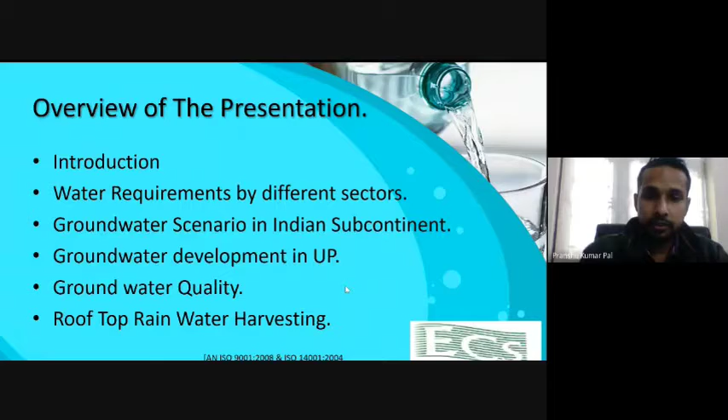Coming on to the introduction, we know water is one of the most important things for human existence, and the human body itself contains about 70% water, and without water, human existence is not possible. Coming on to India - it is home to 16% of world's population, with 2.5% of world's land, but has only 4% of world's water resources at its disposal. And we receive precipitation in the form of rainfall and snowfall, which is about 4,000 trillion liters of fresh water to India. But most of the fresh water returns back to seas and oceans via large rivers flowing all across the subcontinent.

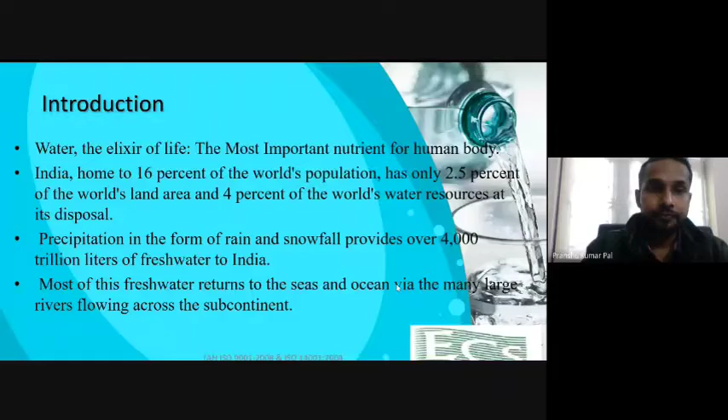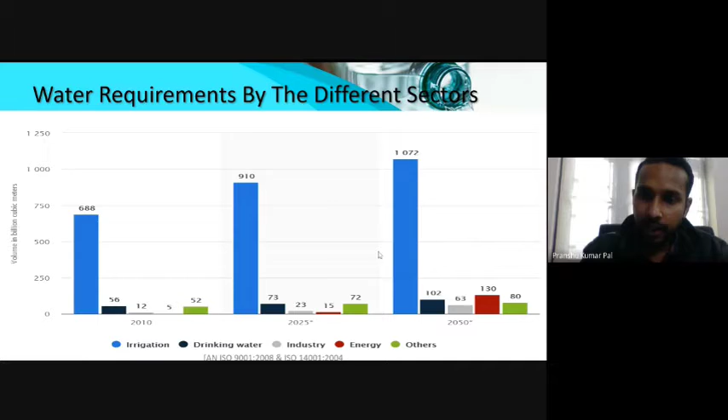Now coming on to the water requirements by different sectors in India. This is the data from Central Groundwater Authority. In 2010, the requirement was 688 billion cubic meters per year. For drinking purpose it was 56, for industry it was 12, for energy it was 5, and the rest 52 - so irrigation contained about 85%, drinking water was 7%, and industrial was 5%. You see the drastic increase in water requirements by different sectors in 2025, and for 2050 it was estimated as follows.

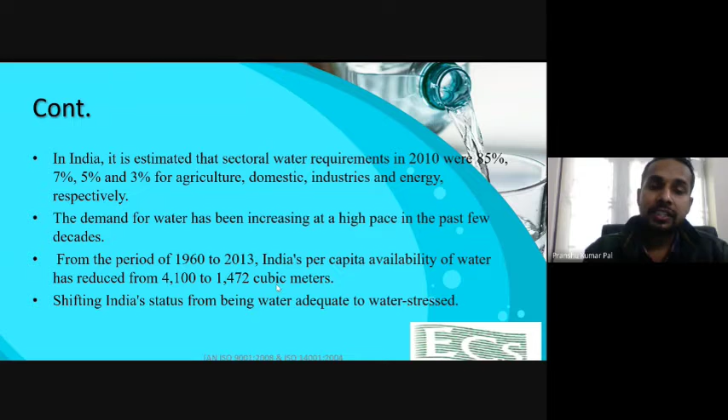Now I have talked about this pointer that 85% was irrigation, 7, 5, and 3 are domestic, industrial, and energy respectively. The water demand has been increasing at a high pace in the past few decades, and from the period of 1960 to 2013, India's per capita availability of water has reduced from 4,100 to 1,472 cubic meters, which has shifted India's status from water adequate to water stressed region.

Now the groundwater scenario in the Indian subcontinent. India's water potential is about 1,869 billion cubic meters per year, but out of which only 1,123 billion cubic meters is usable. Surface water is 690, whereas groundwater is 433 billion cubic meters per year, and out of 433, 35 goes into natural discharge. Thus the net annual groundwater availability of India is 398 billion cubic meters per year.

Now we have only 398 billion cubic meters, but dependency on groundwater is so large in India that about 90% of the groundwater is used for irrigation purposes, for irrigating our agriculture fields in India. About 80% of India's population is highly dependent on groundwater, and our green revolution was also based on groundwater. Due to groundwater only, there was a 25% growth in the agriculture sector.

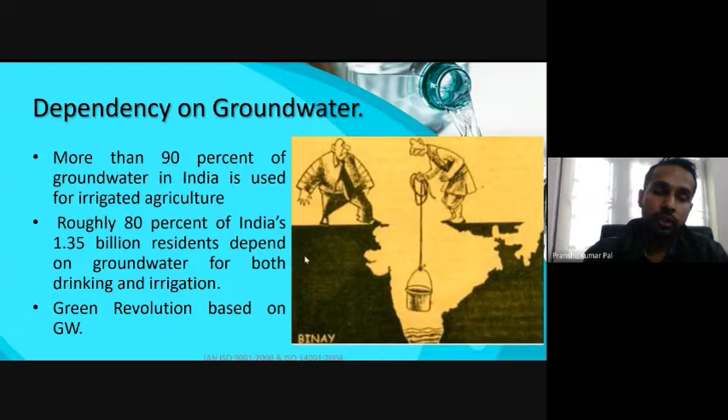Now the groundwater distribution - we all know generally what groundwater is. Groundwater development is the ratio of annual groundwater extraction to the net groundwater availability, and it generally indicates the quantity of groundwater available for use. Based on groundwater development, the comparative status of India has been segmented into 4 parts: safe, semi-critical, critical, and overexploited. If groundwater development lies between 0 to 70%, it is considered safe. For semi-critical, it is 70 to 90%, for critical it is 90 to 100%, and for overexploited, it is more than 100%.

And the groundwater distribution, groundwater development - the number of districts that come under safe are 4,520 districts, for semi-critical 681, critical 253, and for overexploited it's 1,034 districts.

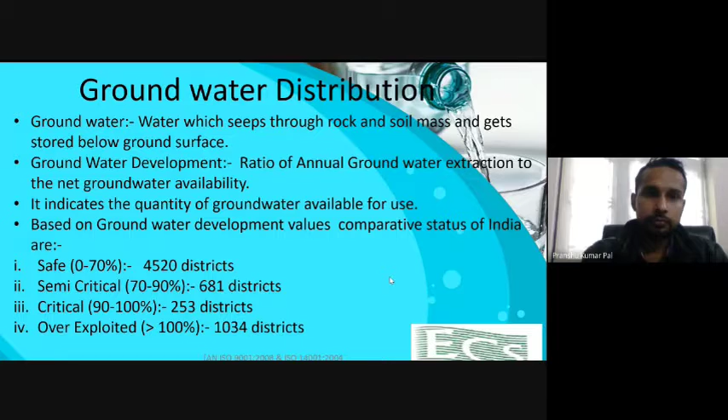Now the groundwater scenario of UP - the hydrogeology of UP can be divided into 5 parts: Bhabar, Tarai, Central Ganga Plains, marginal alluvial plains, and southern peninsular range. Kanpur lies in this Central Ganga Plain. If we move from north to south, the northern part of UP comes under Bhabar, then Tarai, then Central Ganga Plain, and the Bundelkhand region lies in the southern peninsular plains.

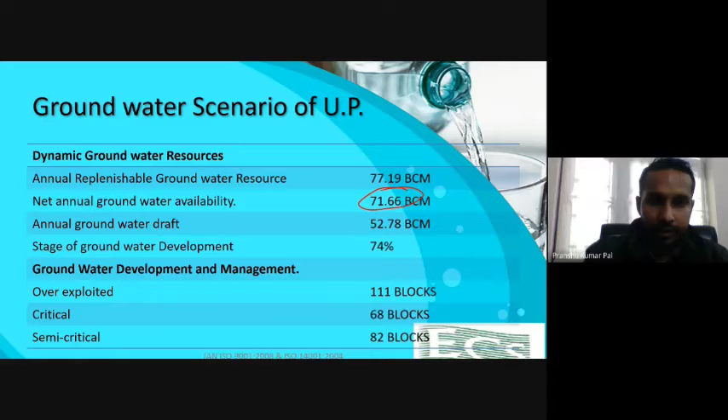Now for UP, the dynamic groundwater resources are as follows: the annual replenishable groundwater resource is about 77.19 billion cubic meters, and net annual groundwater availability is 71.66 billion cubic meters. The annual groundwater draft is 52.78, and the stage of groundwater development in UP is 74%.

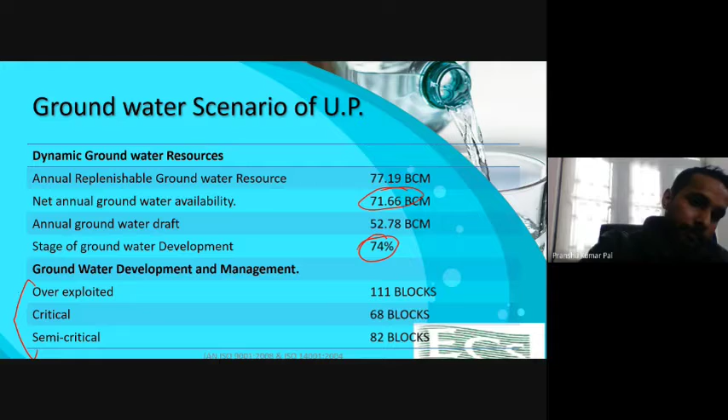We will further talk about Kanpur in the next slides, regarding groundwater development and management. The overexploited regions are 111 blocks, semi-critical are 82, and critical are 68. This was given in the Model Bill 2005, proposed by the Government of India.

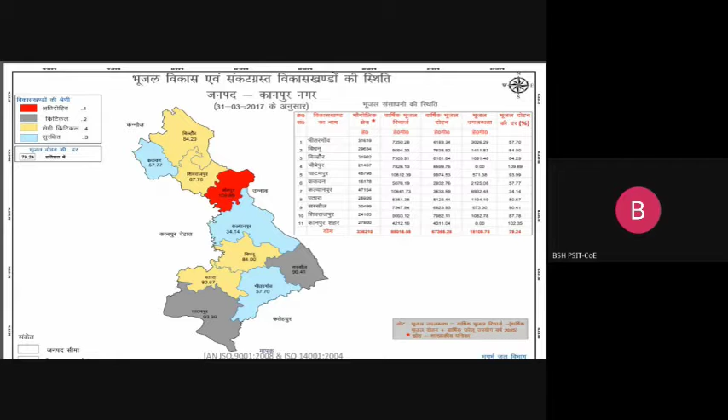Now in this slide you can see the map of Kanpur, with the various blocks shown in the figure. You see Chaubepur, it lies in the overexploited region, whereas we lie in Kalyanpur. It is said to be safe, but according to recent data from the UP Groundwater Board, Kanpur city comes under the overexploited region.

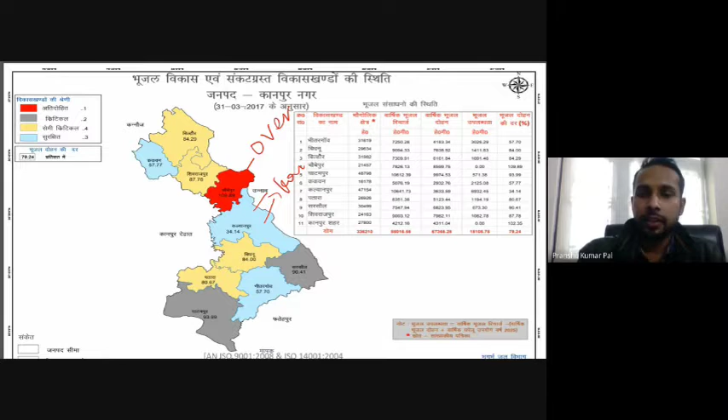You can see the yearly declining trend of the groundwater table. If we talk about Kanpur Nagar, Shivrajpur and Kalyanpur, the annual declining trend is 1 to 10 centimeters per year, and for Chaubepur and Bidhnoo, it's between 10 to 20.

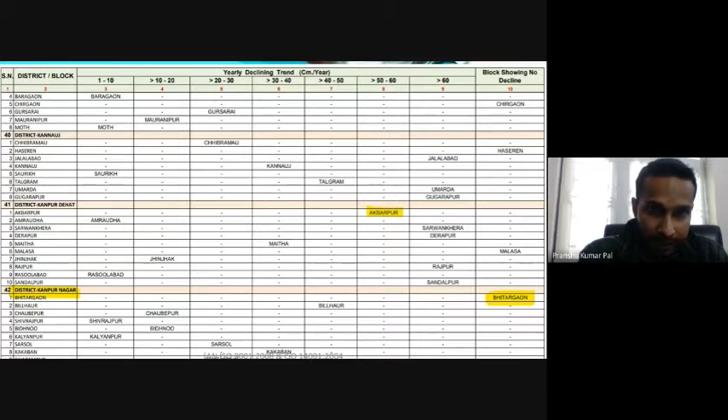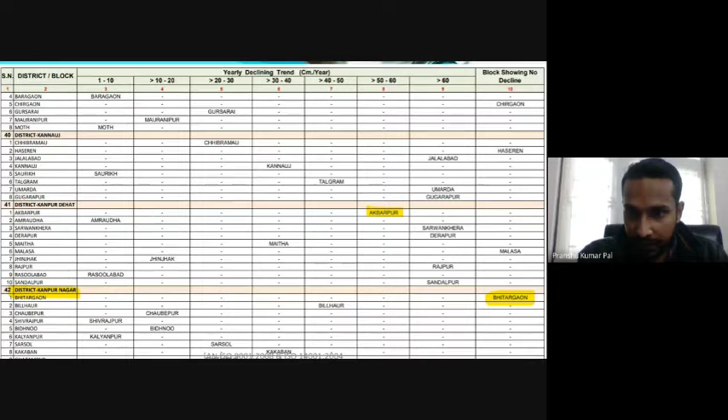Similarly, if we talk about Patara, it is declining very rapidly, more than 60 centimeters per year. For Kanpur Dehat, you see Sarwankhera, Derapur, Rajpur, and Sandalpur - all these are declining at a very fast pace of more than 60 centimeters per year.

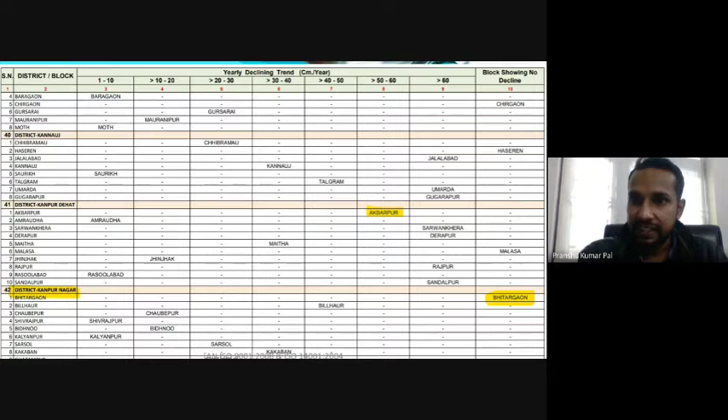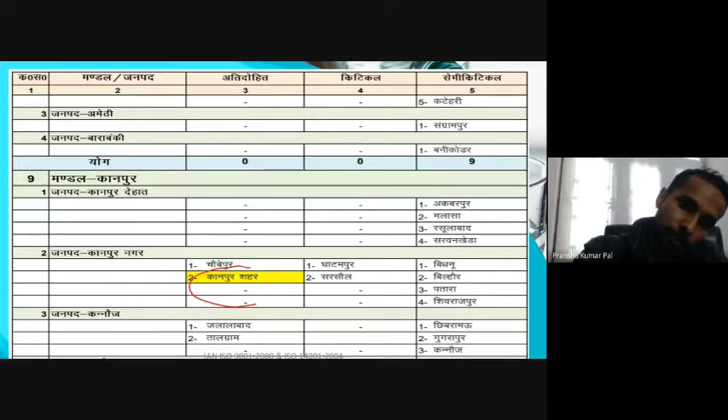You see this is the overexploited region, shown as Kanpur city and Chaubepur. In this table, if you look at Kanpur city, this is the new stage of groundwater extraction. Earlier in 2012 it was about 70, but in 2017 this data shows it's about 79.24 - a 9% increase has been seen in 3 to 4 years.

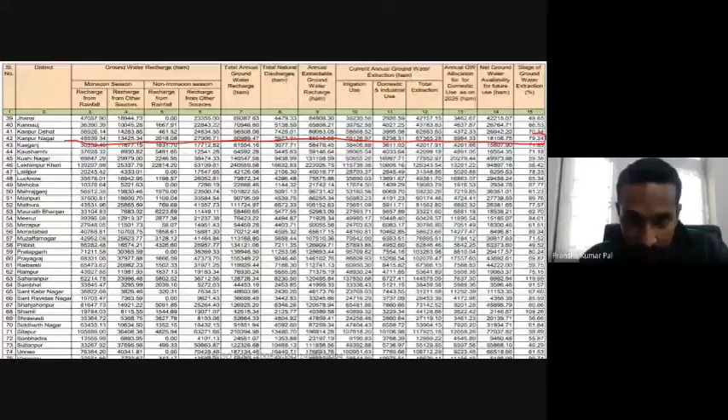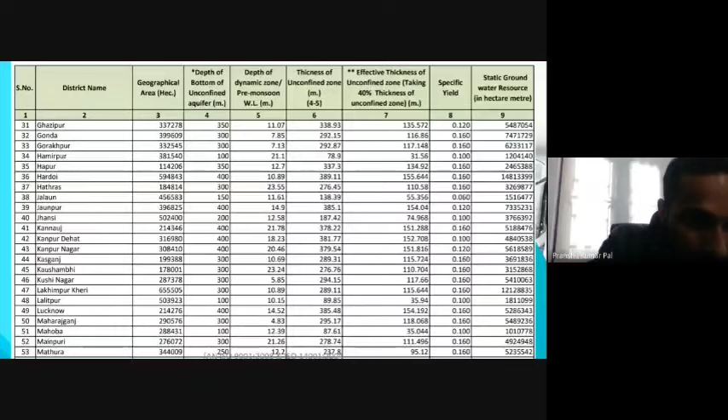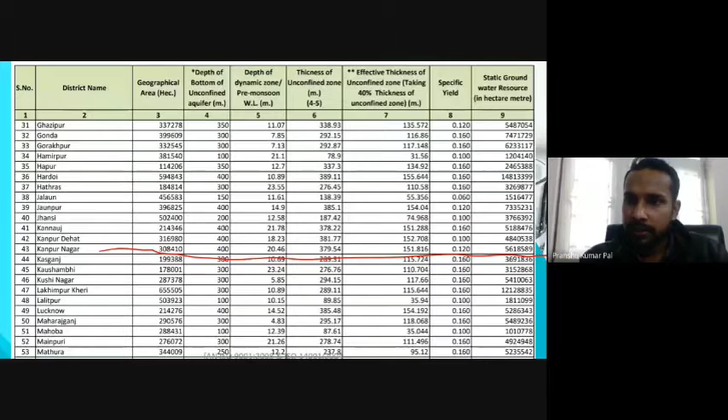This table shows groundwater recharge for monsoon and non-monsoon seasons, the total availability of groundwater, and current annual groundwater extraction for various cities, focusing mainly on Kanpur. Again for Kanpur, the specific yield is about 12%, and the static groundwater resource is 56,18,589, with the thickness of the groundwater table shown.

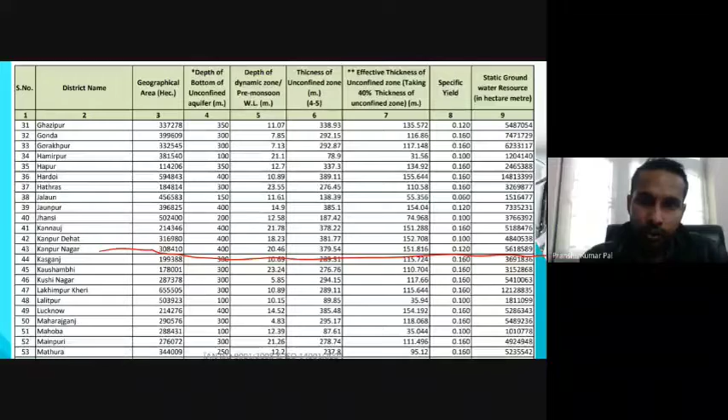Now we have talked about groundwater quantity. Now we will talk about groundwater quality in UP. If we talk about salinity, the most affected districts are Agra, Hathras, and Mathura.

For fluoride, the most affected districts are Agra, Aligarh, Etah, Firozabad, Jaunpur, Kannauj, Mahamayanagar, Mainpuri, Mathura, and Maunath Bhanjan. We all know that fluoride causes fluorosis, so it is a very acute problem.

Similarly, for chloride and iron, these are the affected districts. In some areas of Kanpur, iron is a prominent contaminant. For arsenic, these are the new districts affected, and it is not clear to agencies whether this contamination is geogenic or anthropogenic till now.

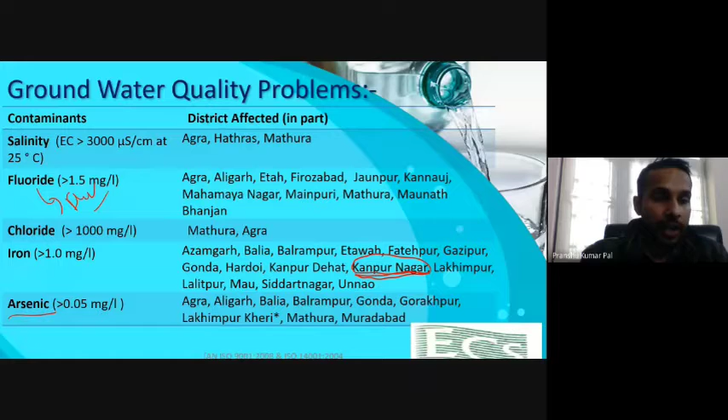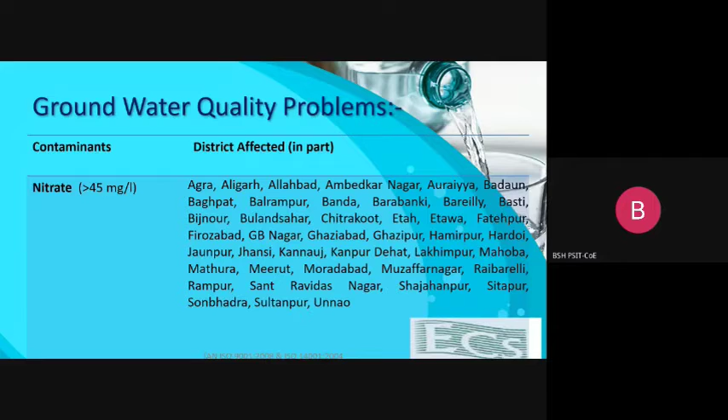And for nitrate, it is heavily affecting a number of districts. These were the problems related to quantity and quality of the groundwater.

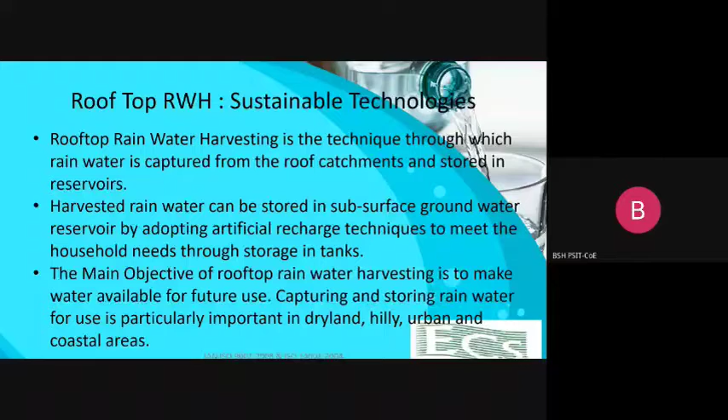Now talking about sustainable technologies, rooftop rainwater harvesting is one of the prominent technologies we can use to replenish the groundwater. It is a technique through which rainwater can be captured from the roof catchment and stored in a reservoir. Harvested rainwater can be stored in subsurface groundwater reservoirs by adopting artificial recharge techniques to meet household needs through storage in tanks. The main objective of rooftop rainwater harvesting is to make water available for future use, particularly important in dryland, hilly, urban and coastal areas.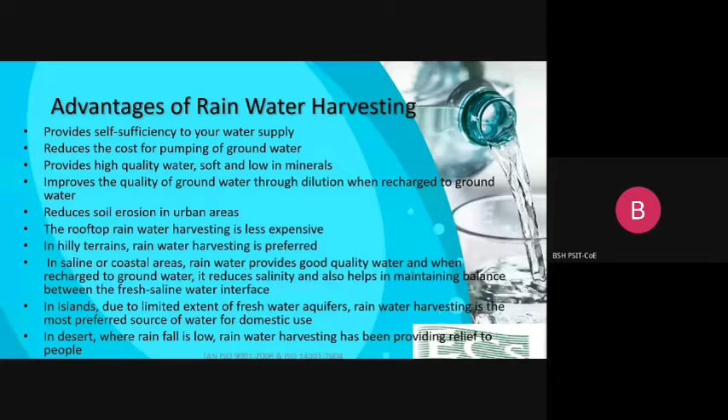Now, what are the advantages of rainwater harvesting? It provides self-sufficiency to water supply, reduces the cost of pumping of groundwater. It provides high quality water, soft and low in minerals, improves the quality of groundwater through dilution when recharged to groundwater, and reduces soil erosion in urban areas.

The rooftop rainwater harvesting is less expensive than other technologies. In hilly terrains, rainwater harvesting is preferred. In saline coastal areas, rainwater provides good quality water when recharged to groundwater. It reduces the salinity and helps maintain balance between the fresh-saline water interface. On islands, due to limited extent of fresh water aquifers, rainwater harvesting is the most preferred source of water for domestic use. In deserts, where rainfall is low, rainwater harvesting has been providing relief to the people.

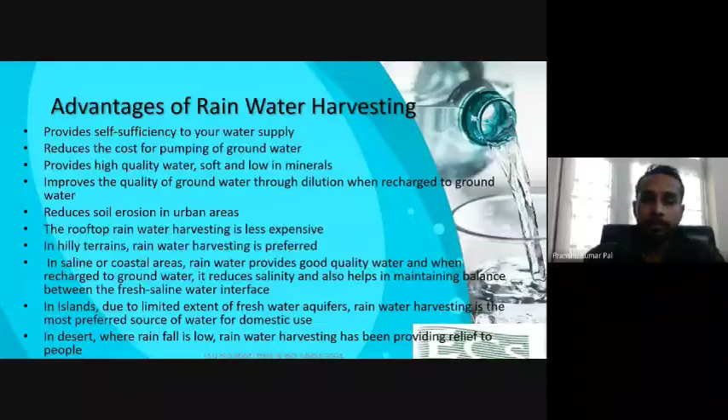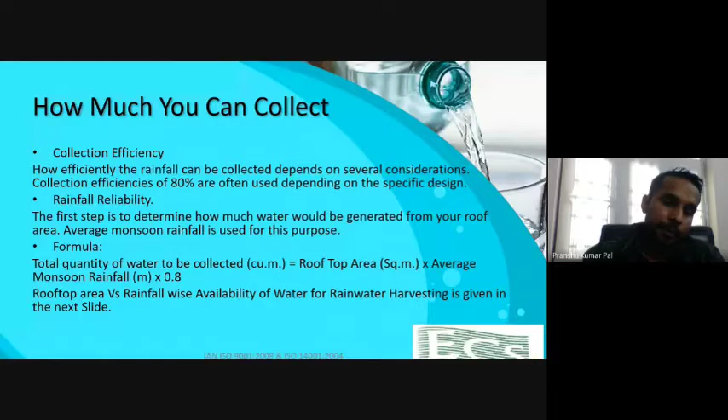So now we come to the designing part of the rainwater harvesting system. First of all, before installing the rainwater harvesting system, we should know how much water we can collect through this system.

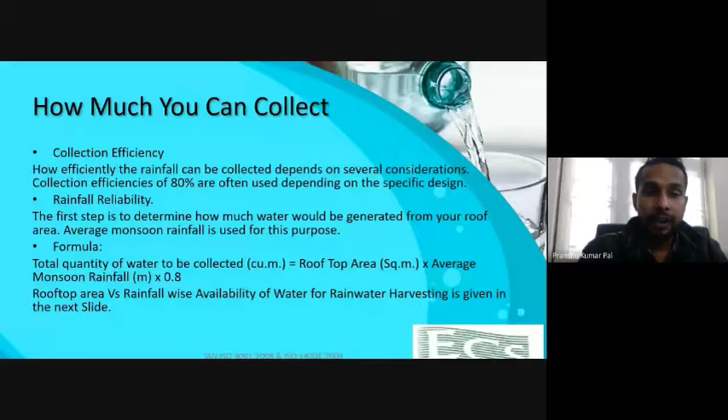Generally we adopt 80% collection efficiency, and 20% is the loss. And we must know the rainfall reliability, meaning the average rainfall and the rainfall intensity at a particular place, before providing the setup of rainwater harvesting at our premises.

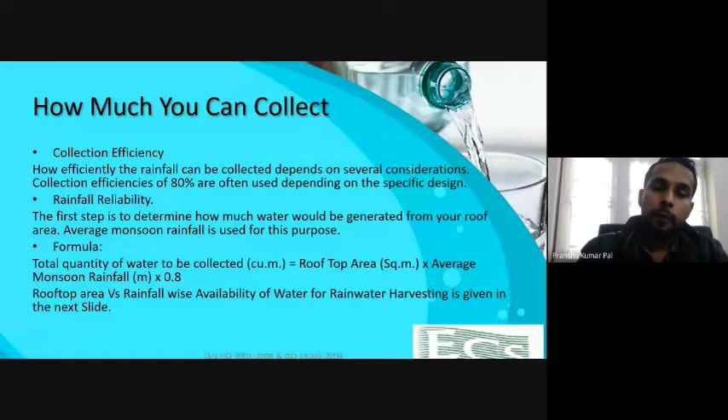So the total quantity of water that can be collected is calculated by the following formula. First, we should know the rooftop area in square meters, and the average monsoon rainfall. For Kanpur, it is about 820 centimeters per year on average, and 80% is the collection efficiency.

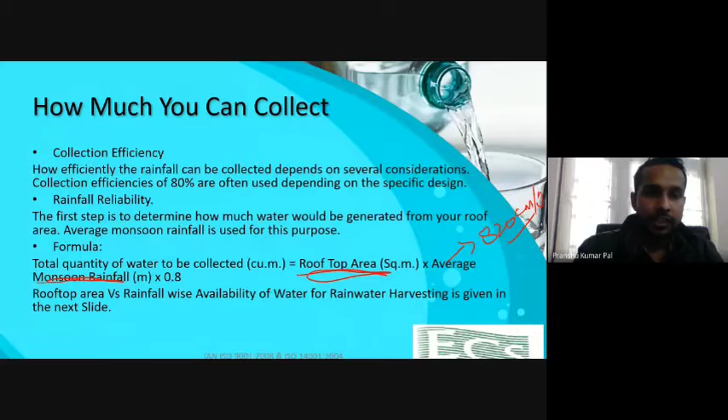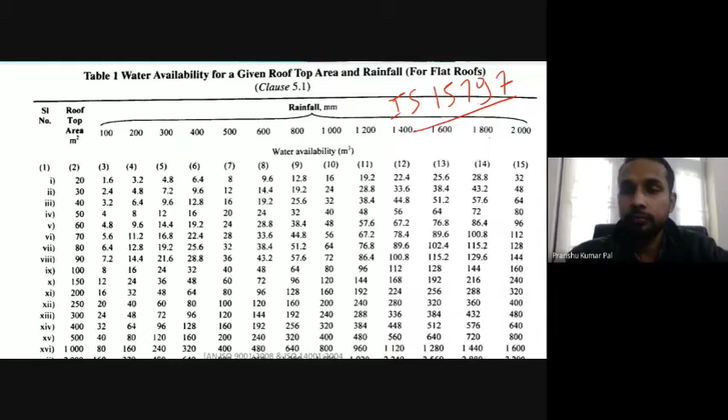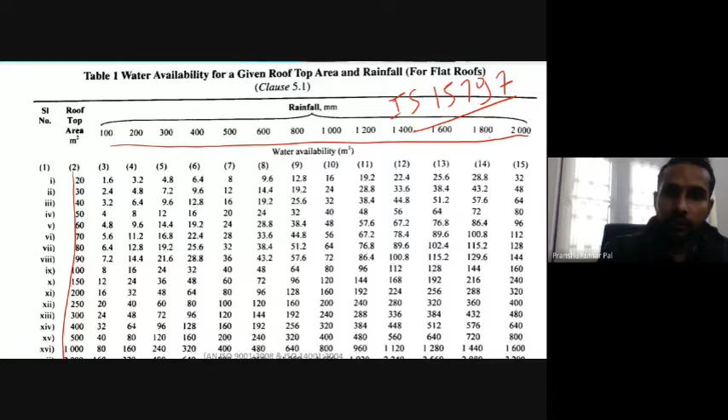Now, for the designing of rooftop rainwater harvesting, we follow IS 15797. In this table, we can see the rooftop area has been given in the second column, and the average rainfall is on the x-axis. Through this we can calculate the water availability in cubic meters at a particular area.

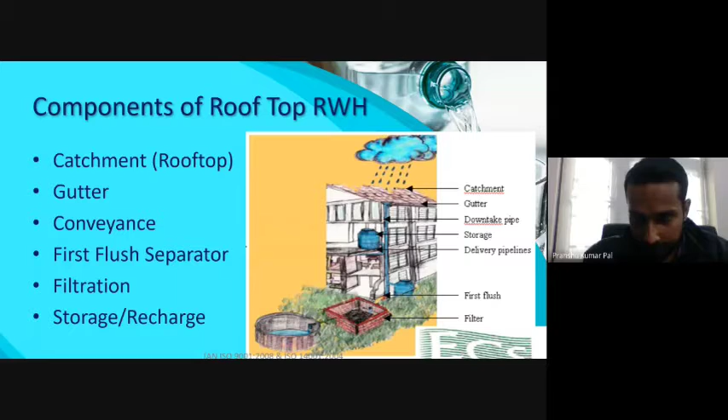Now the components of rooftop rainwater harvesting: first catchment, then gutter, conveyance, first flush separator, filtration, and storage. You can see in this diagram the different parts have been labeled.

Now, talking about the catchment, it is the surface from which rainwater is collected for storage. This could be the rooftop, a paved flooring surface, or a landscape area. Catchment area is the area of that surface, usually calculated in square meters.

The gutters and downtake pipes lead the water from the catchment to the storage tank. The filters and first flush devices are provided because the water may contain leaves and dirt which may clog our system. So a first flush system is provided, and dissolved air pollutants are also present in the first rain. The storage tanks are provided, which may be above or below the ground.

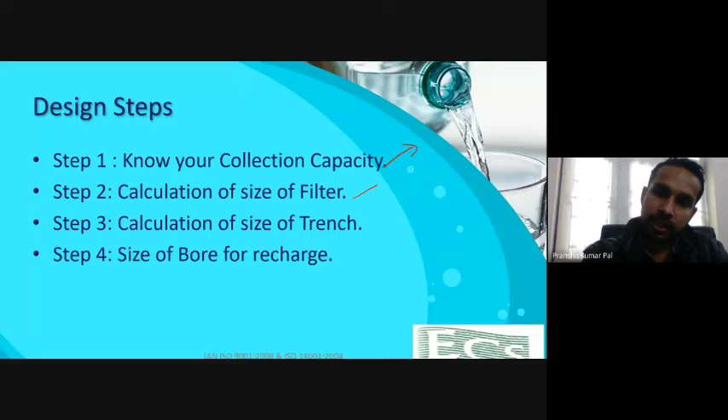So coming on to the design steps, we must know the collection capacity that we have calculated in the earlier slide. Then calculation of the size of filters, calculation of size of trench, and size of bore for recharge. We'll know about it in the next slides.

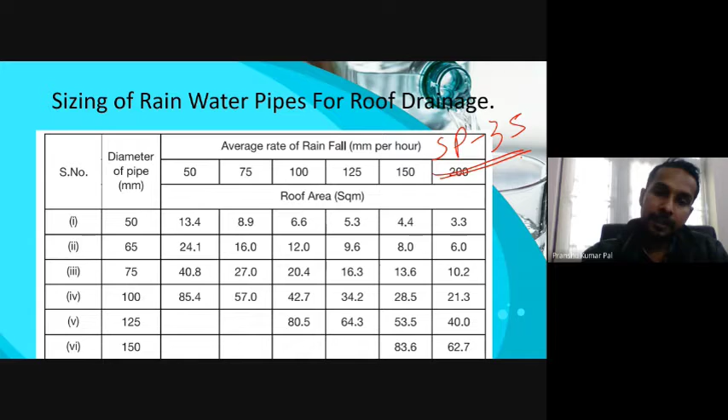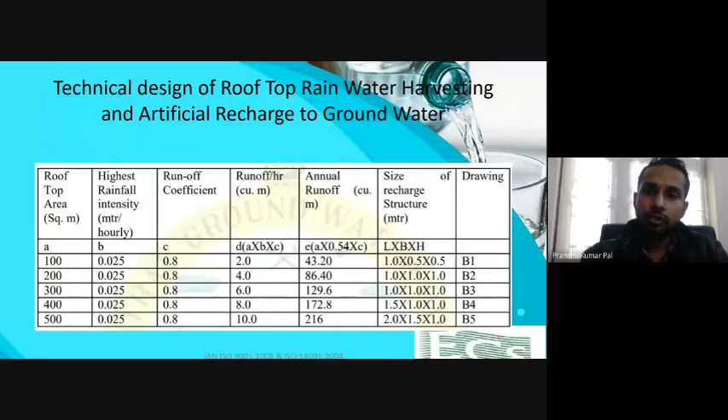This is the technical design of rooftop rainwater harvesting and artificial recharge to groundwater. In the first column, A, the area of the rooftop in square meters is given. This is the highest rainfall intensity in column B, given as 0.025, for the state of Delhi.

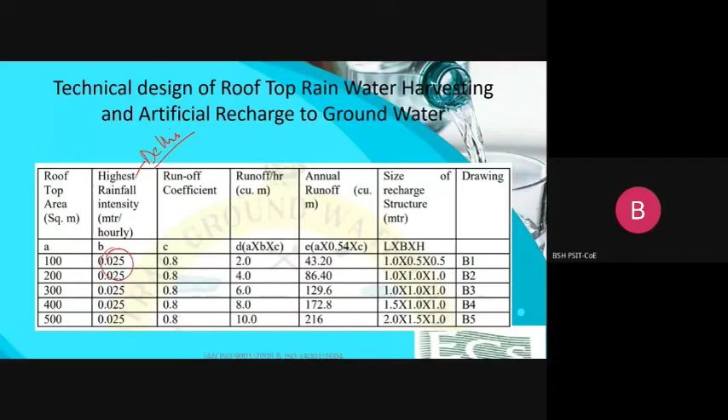This data is from the Central Groundwater Board, and the runoff coefficient is 0.8. Runoff per hour is calculated by multiplying columns A, B, and C, and the annual runoff is calculated as A into 0.54 into C, where 0.54 is the average rainfall of Delhi.

Similarly, if we have to calculate for Kanpur, then instead of 0.54, it would be 0.82, and the rainfall intensity ranges from 0.035 to 0.045 from place to place in Kanpur, and generally we take 0.04.

So this is the size of the recharge structure. We'll see in the further next slides, in the further drawings.

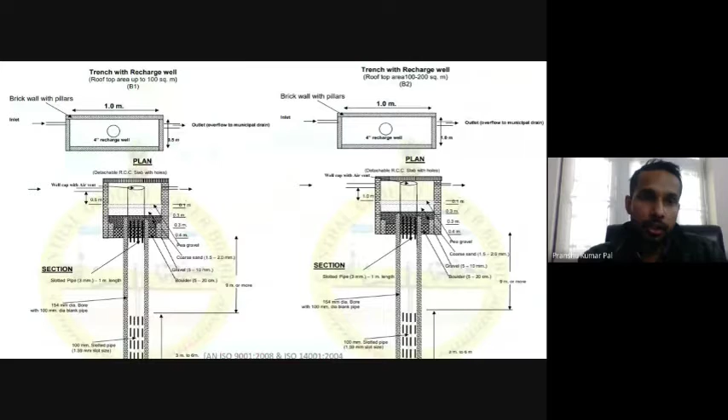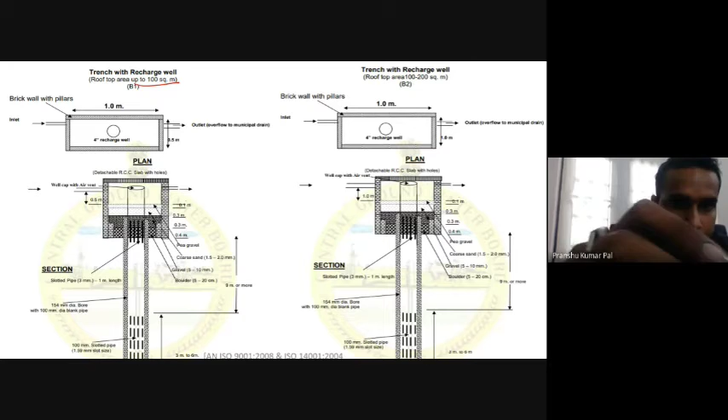This is the diagram for the rooftop area up to 100 square meters. The size of trench that we take is 1 meter by 0.5 meter, and the bore size is 4 inches. This is the plan, and this is the cross-sectional view of this drawing.

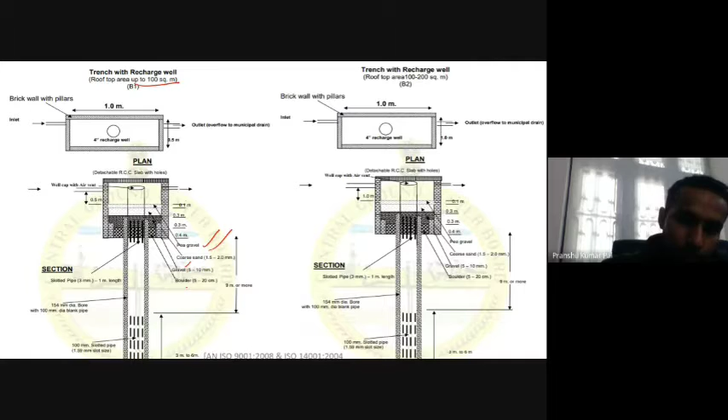And we provide pea gravel, coarse sand, gravel, and boulders, and the pipe is slotted at two places: here at the filter, where we provide filter, and at the last. In the end, we provide a ball plug.

The total depth of the boring is about 50 to 100 feet, but here in industry we take about 100 feet of boring, and we provide the filter same as prescribed in the Central Groundwater Board report.

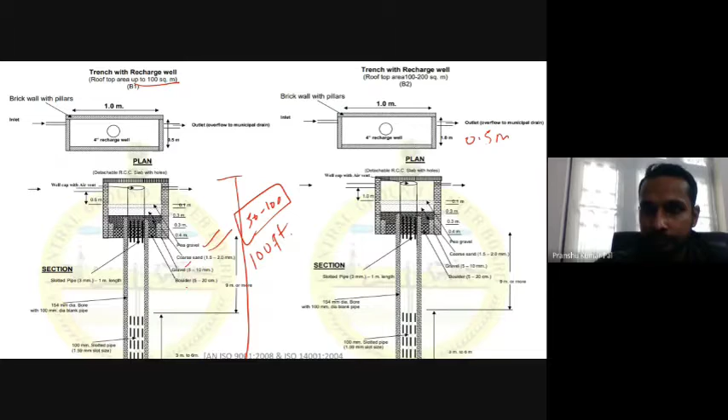So this is the cross-sectional view, and for the rooftop area between 100 to 200 square meters, the trench size has been increased by 0.5 meters, and rest it's the same, as you can see.

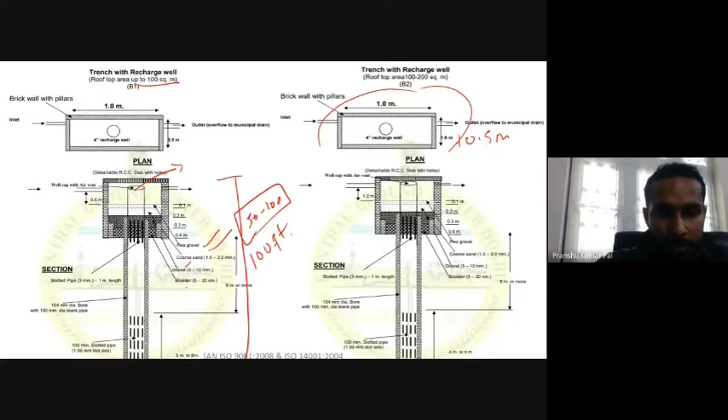One thing we have to focus on is that we have to provide an air vent so that gravity flow must take place, and capillary action should not occur. Another thing is the pea gravel that we use.

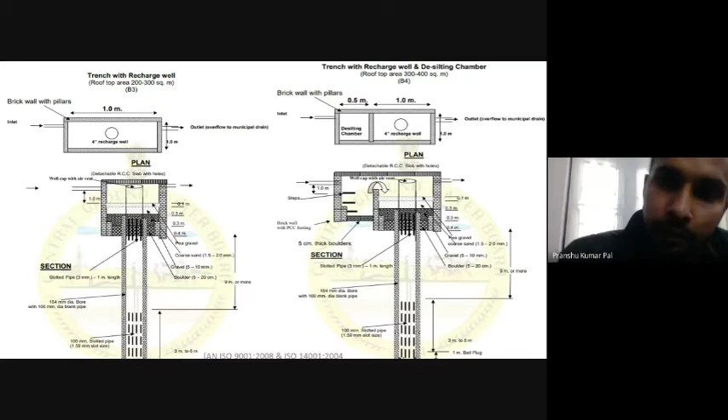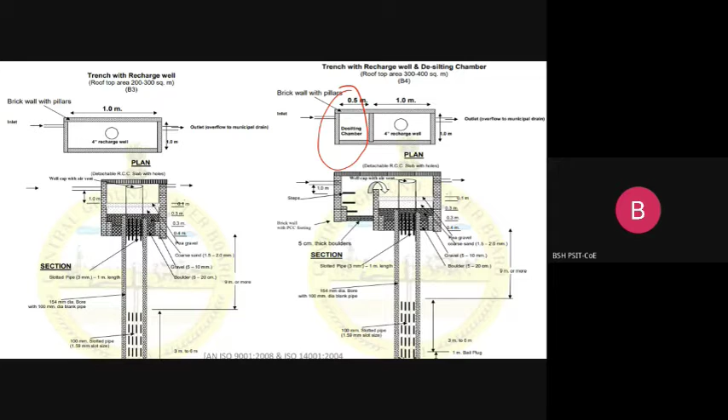Similarly, for 200 to 300 and 300 to 400 square meters, the size of the trench has been increased. For 300 to 400, one additional provision has been made, a desilting chamber of 0.5 by 1 meter, so that our system does not clog. The silt and grit coming with the water settles down there, and a free flow passage is provided.

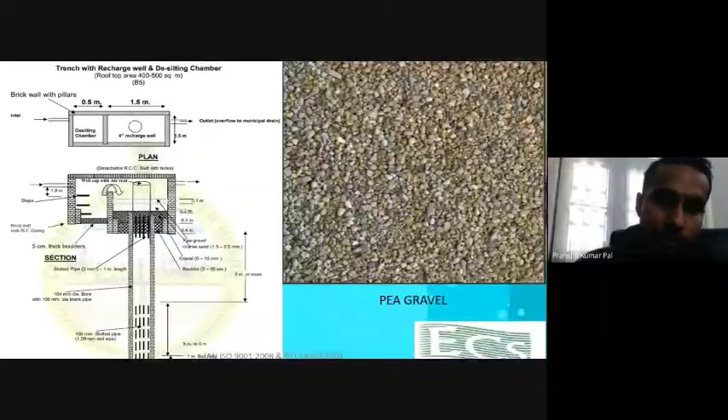For the rooftop area between 400 to 500 square meters, we follow this drawing, where the desilting chamber size and the trench size have been given. The trench is about 1.5 by 1.5 meters, and the desilting chamber is 1.5 by 0.5 meters, and all other things are similar.

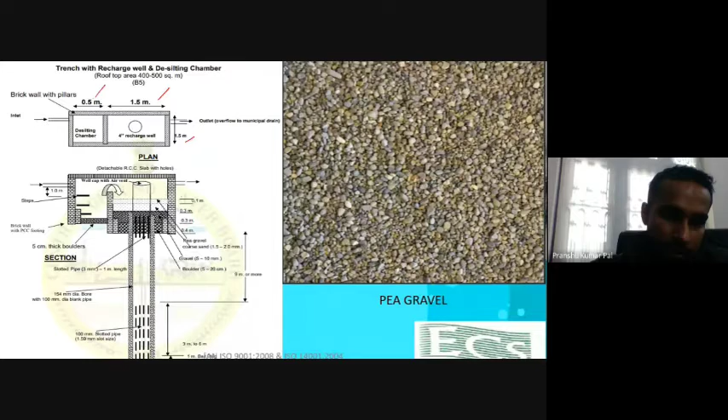These are the pea gravels, and these are found in areas like Rishikesh and Haridwar. We find gravels on the banks of the river Ganga that are similar to these pea gravels. This is a drawing we have installed in one of the industries.

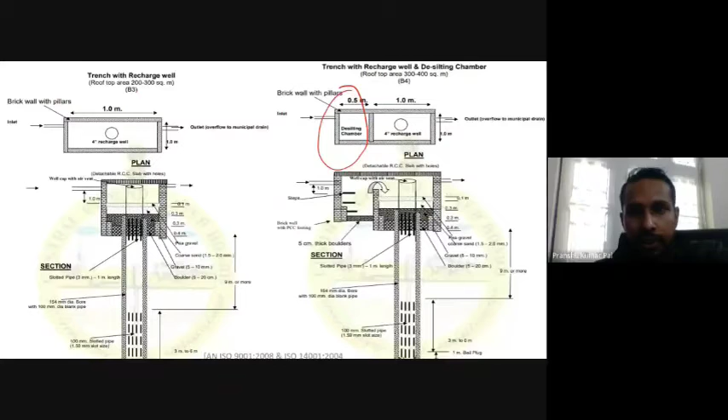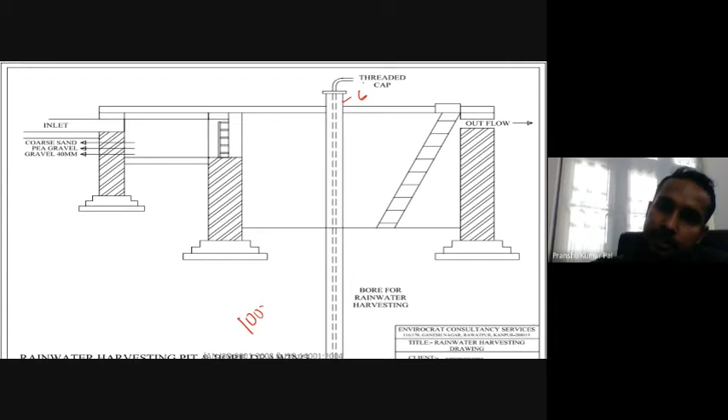We generally make desilting chambers because they have better efficiency, whether we are constructing for 100 square meters or less. The bore size we take is generally 6 inches, so that our system does not clog. So this is how you design.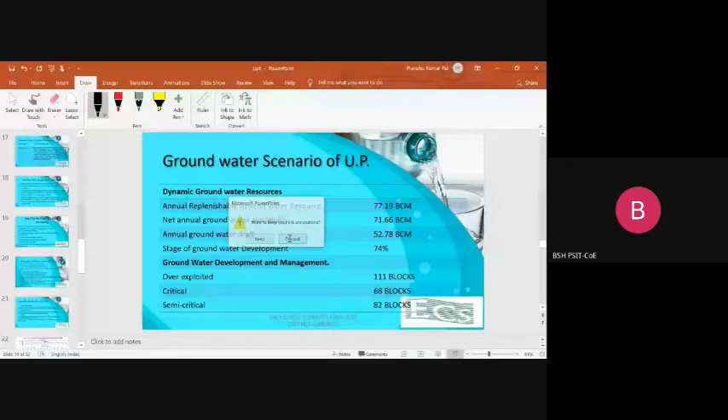Sir, am I audible? Yes, sir. Yes, ma'am. So actually there is one query.

Rooftop rainwater harvesting, when it is allowed to go to groundwater, is there a possibility that the foundation gets affected by stored water? Most of the time when water is getting recharged, will it not cause harm to the bearing capacity of the soil, affecting the foundation and reducing the building's life?

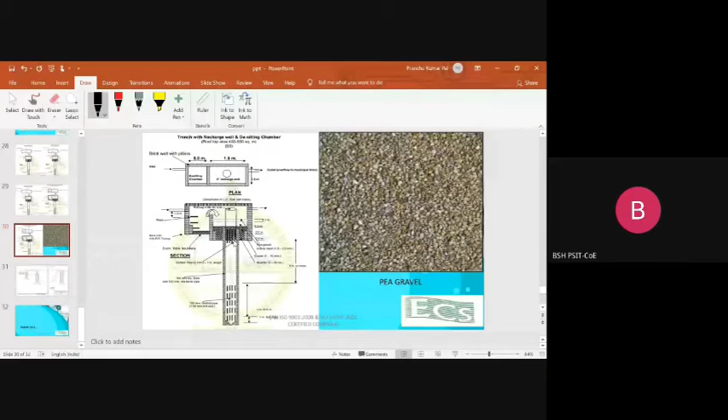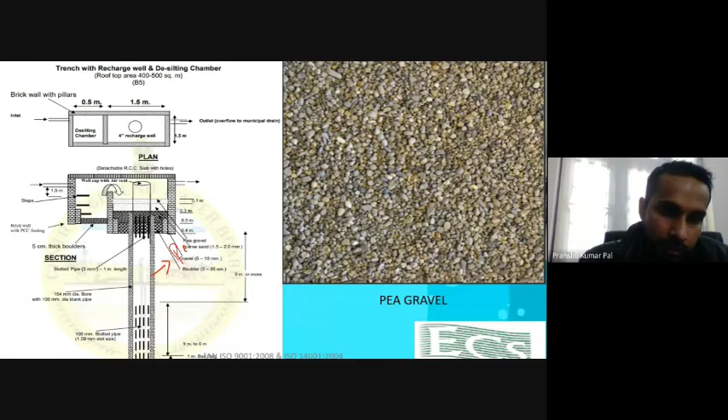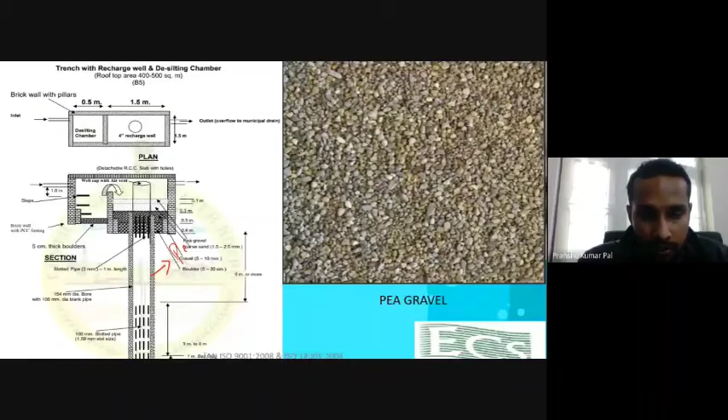Actually, this is an engineered structure. We are providing the boring, and as you can see, we are providing these pea gravels, so the efficiency of absorption of water and transfer of water into the strata is quite high. So we won't see dampening and such issues, and the bearing capacity of the soil will not be reduced.

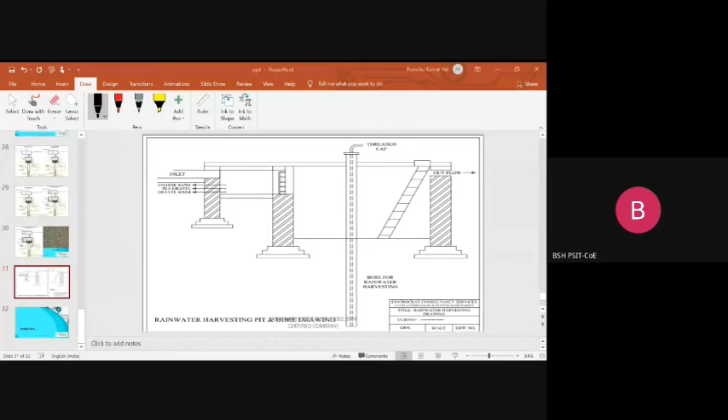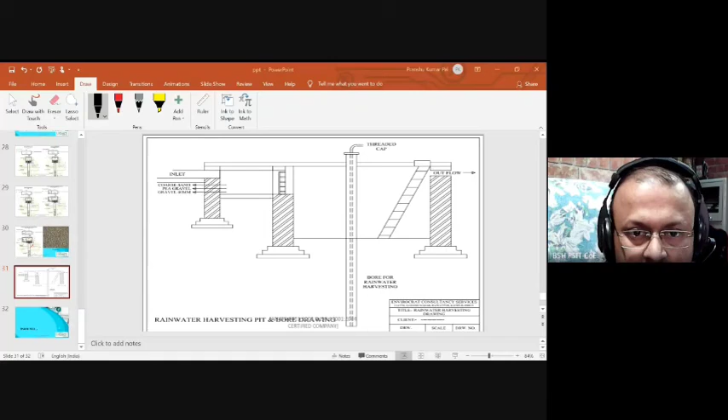Am I audible? Yes, sir. There are some questions from the participants. He's asking about rooftop rainwater harvesting when it is allowed. Some more questions are there. So what I will do is send them to your email ID, and I will share your email ID with the participants, and then they will ask directly.